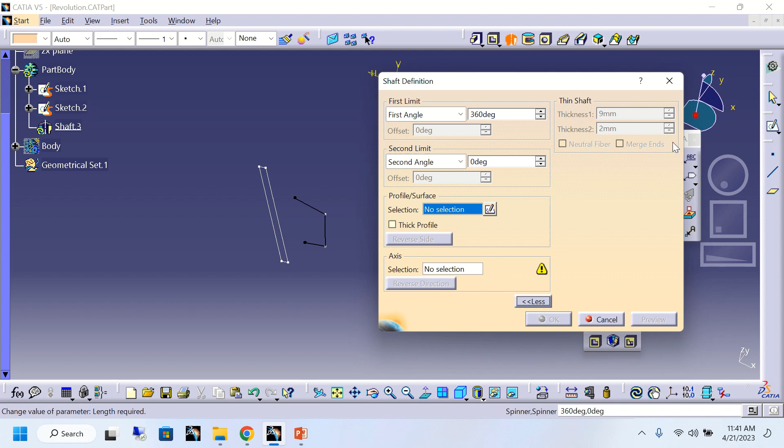And second, you have thin shaft - what is the thickness, neutral fiber, merge - all these things we will cover in this video. So let's go with the shaft.

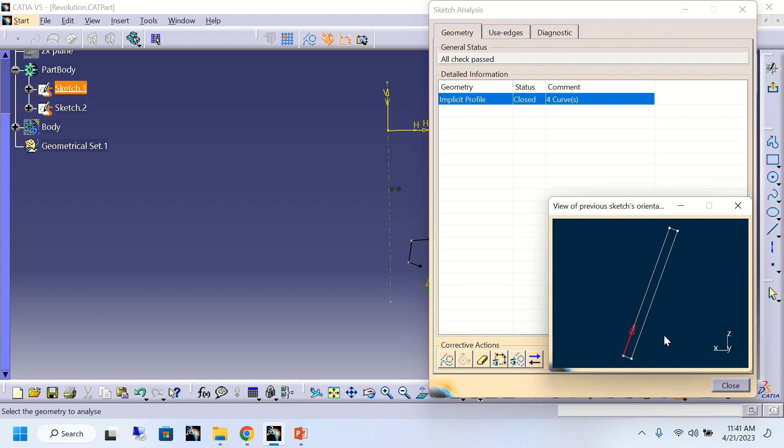This is my profile. You can see I have created two profiles - sketch 1 and sketch 2. Sketch 1 you can see is a closed profile. If you go with sketch analysis, you can see here it is a closed profile. And here I have taken one axis.

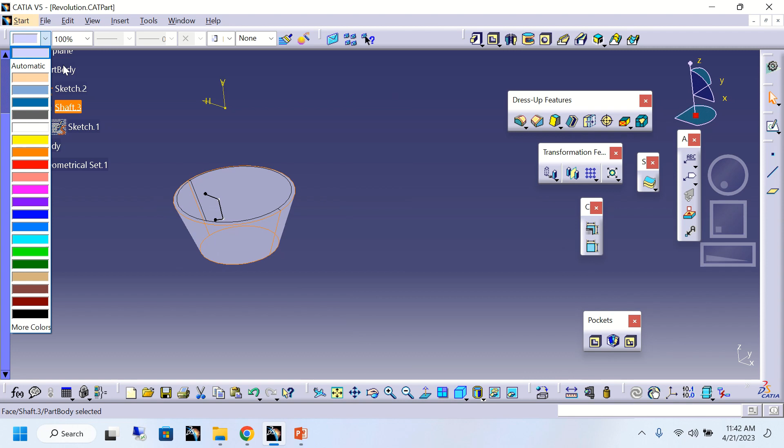Exit out and apply shaft, and reverse the shaft direction. Let me change this color so it will be easily understood. You can see this is the shaft I have done on sketch 1.

Double click here and you can give the thickness also. See, the thickness I added is 9mm, but I want it thick only 1mm, and the second thickness also 1mm. What does this neutral fiber mean?

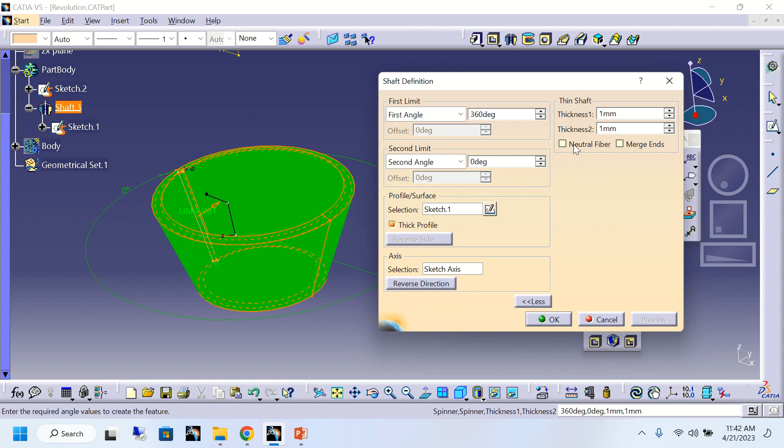Whatever the thickness is, it will distribute from this axis. So let the second thickness be 0 and first thickness be 2. If I give neutral fiber, it will distribute from the middle axis - both sides will add same material, 1mm and 1mm.

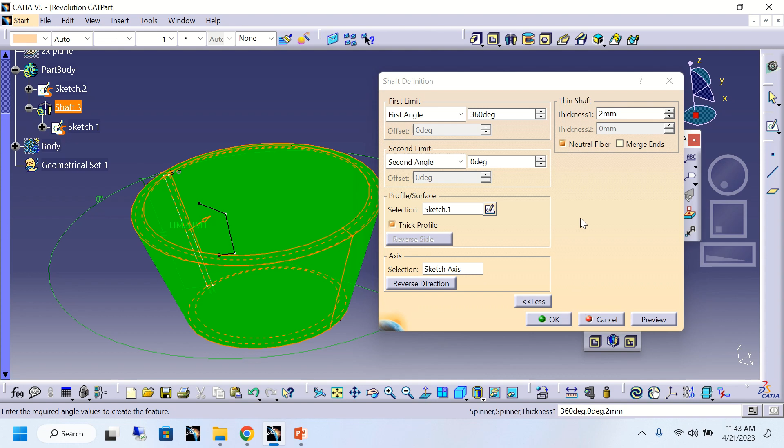So this is the first shaft creation, and here the first sketch is a closed profile. That's why it has taken the shaft directly.

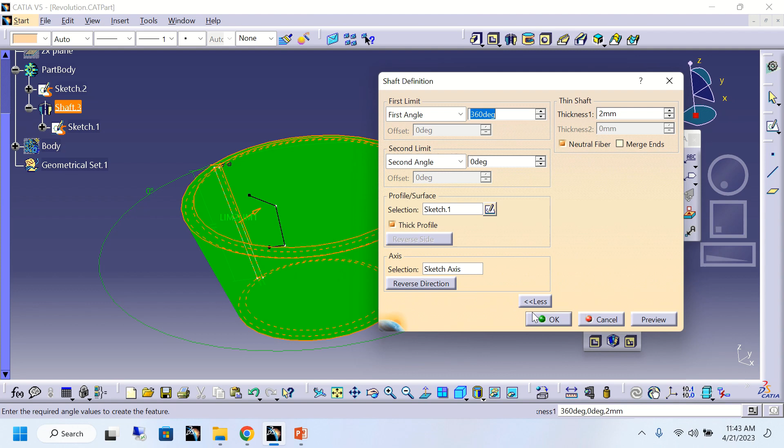Now let's come to the open profile. I will apply shaft here with the second sketch, sketch 2, and you can see it is not taking preview. It says this is impossible because of elimination of the main part, since it is not a closed profile.

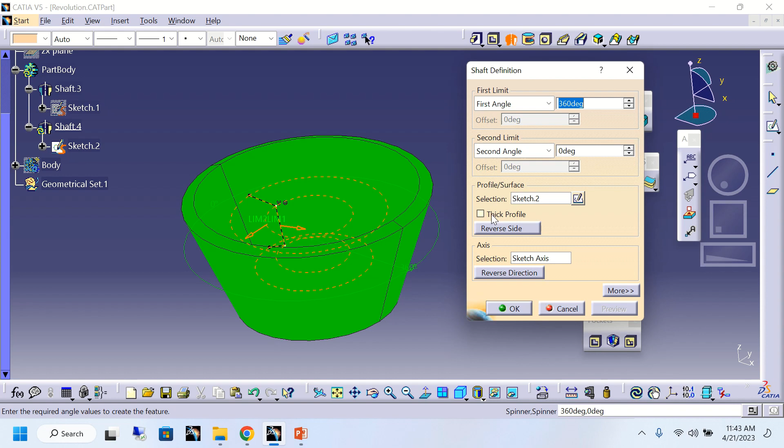So what you need to do is add a thickness here. Check on thickness and give the thickness value as 1mm. Preview with 1mm thickness.

If you give this 1mm thickness with neutral fiber, both sides will add 0.5mm and 0.5mm automatically. So if you give 5mm or 6mm with neutral fiber, both sides will add 3mm and 3mm, as shown in the preview.

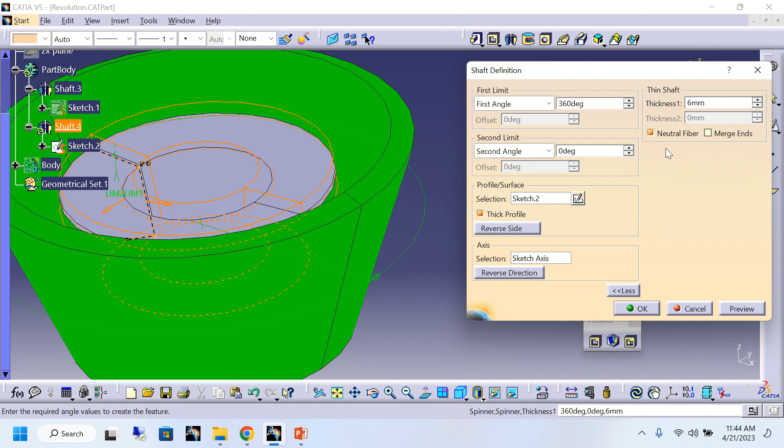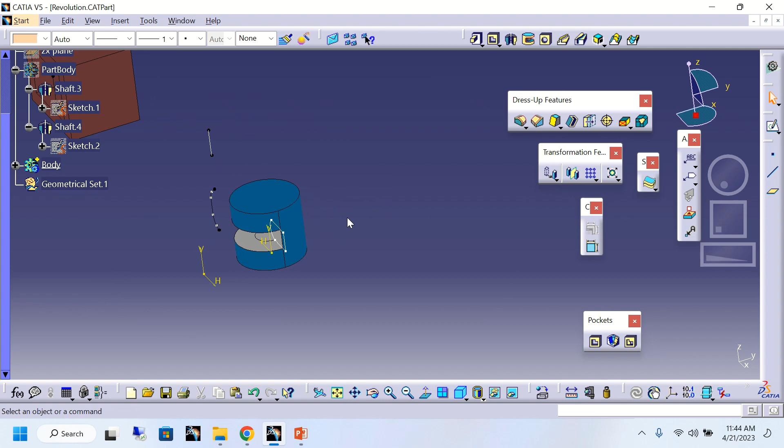Okay, so in this way we can create the shaft. Now we have other options also. I will hide this one and go with the other option.

Now we'll see what is the difference between the neutral fiber and the other fiber option. So here I will apply the shaft here, on this sketch.

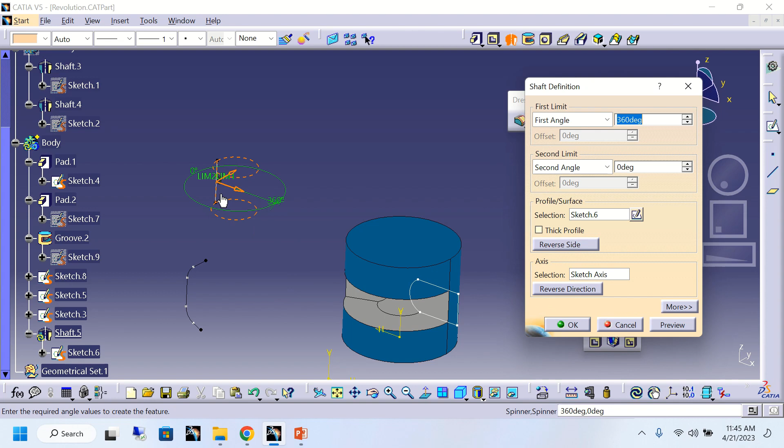Sketch 6 - you can see it is impossible because it has no thickness. So I will give a thickness here, and the thickness value is 6mm.

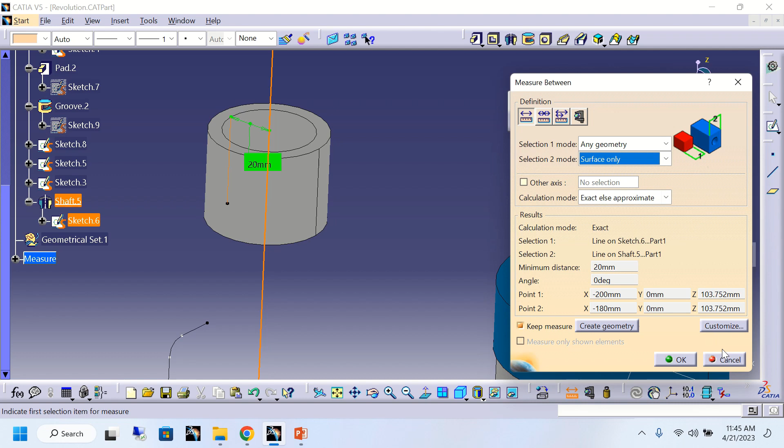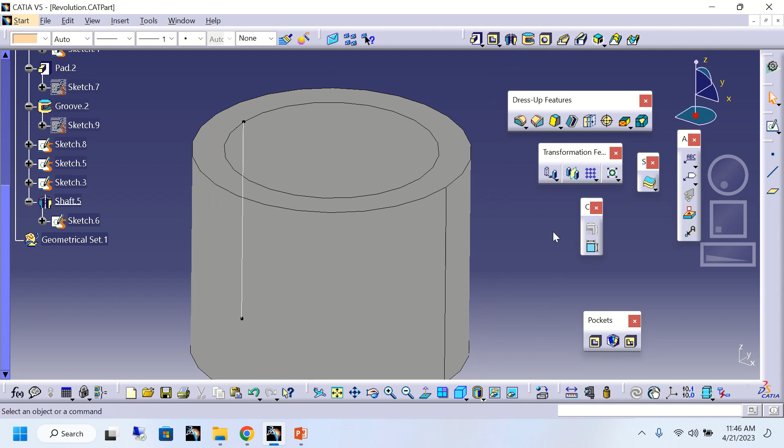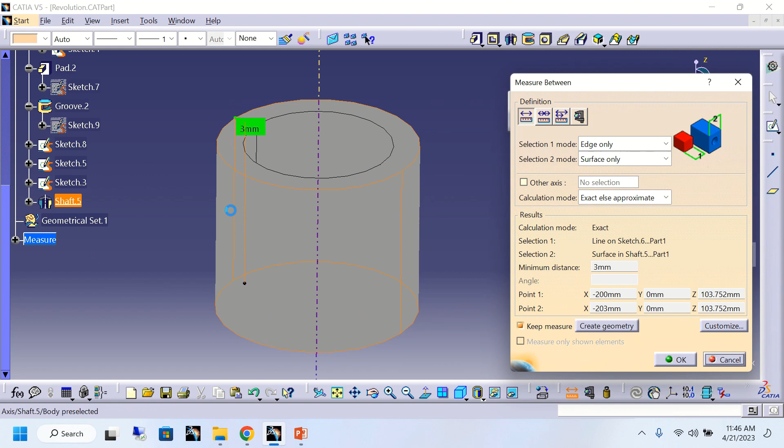But now I will change this to neutral fiber. Now you will clearly understand the difference of thickness with neutral fiber. Preview - so now if you calculate this from the measured edge and surface, it is 3mm.

And from this edge you can see it is also 3mm, meaning it has added 3mm on both sides. So hope you understood this neutral fiber concept. Now let's come to the other one.

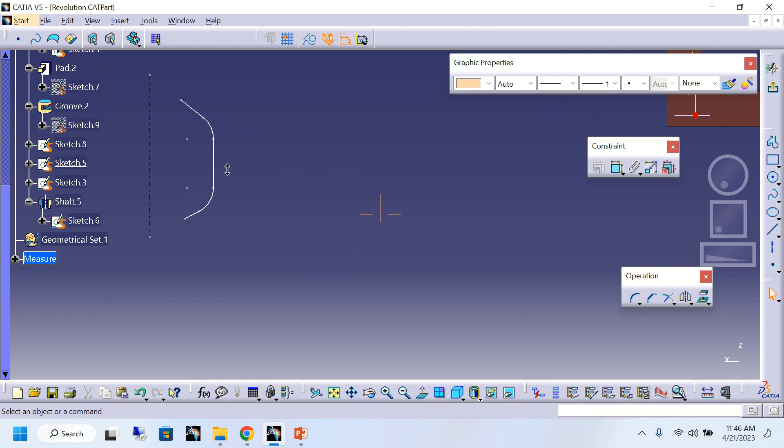So this is my fifth sketch. I have created a profile and an axis here. So I will give a shaft, and you can see I have rotated this with the first angle of 360 degrees.

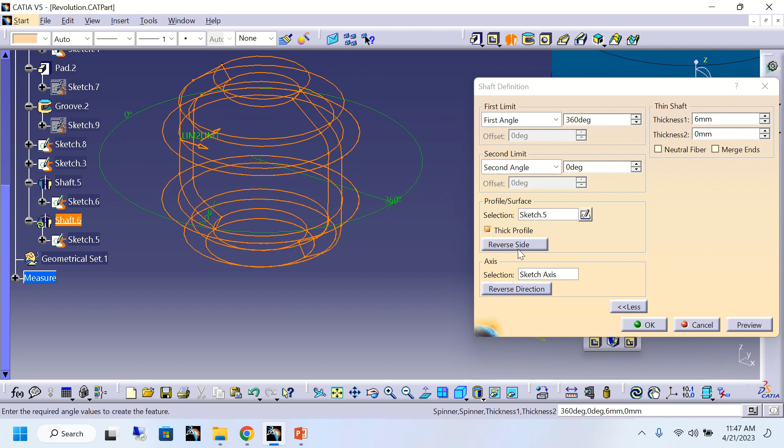I applied the thickness here. If you are not applying this thickness, you can see it is a closed surface. If you are not applying the thickness, it takes the closed volume - how to check that one?

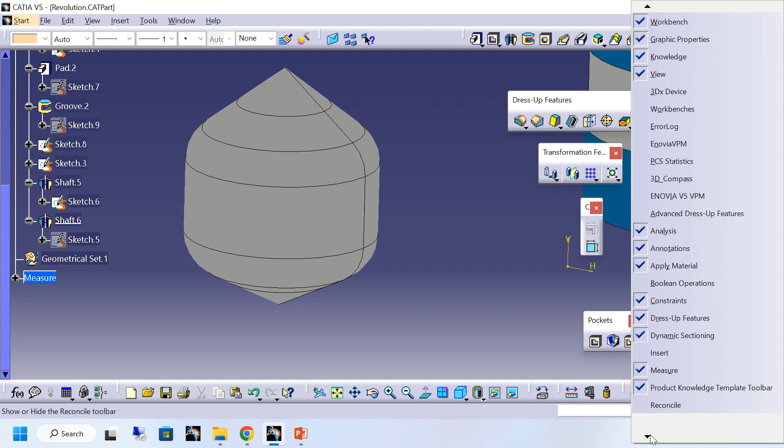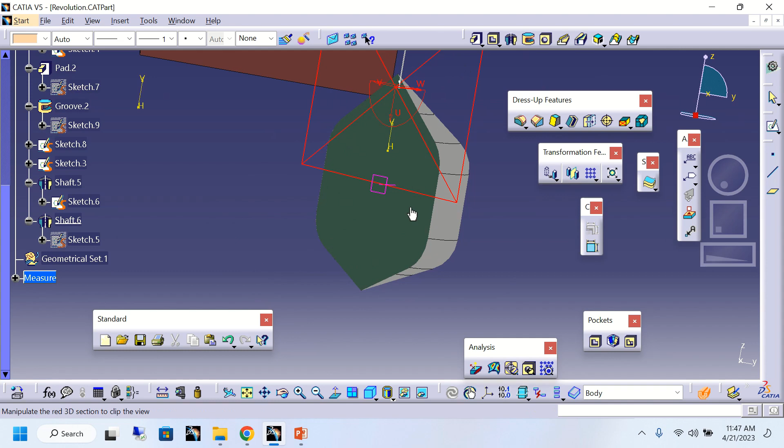We don't have any option. I believe dynamic sectioning is there. I believe it's there. Yes, you can see. Close volume. See, it is not a hollow section, but I want a hollow section inside. So in that case, what you need to do is shaft.

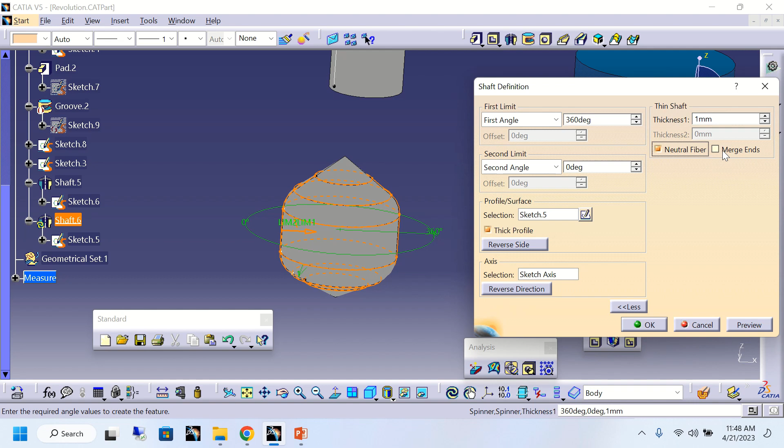You need to give the thickness. Double click, and here I apply the thickness. Let it be 2 mm or 1 mm. Here I will apply neutral fiber, and see neutral fiber. If I keep the thickness, see what happens. It is taking thickness 1 mm, but it is hollow. It is not merged with this.

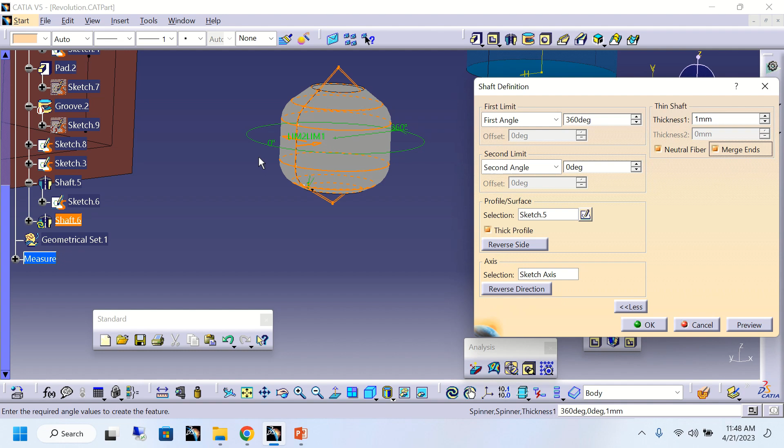So in that condition, what you need to do is double click on the shaft, and here 1 mm thickness is there. Just merge, and whatever edge is there, it will merge with the axis. So preview. Okay, now your merge ends has been defined, and you can see the difference.

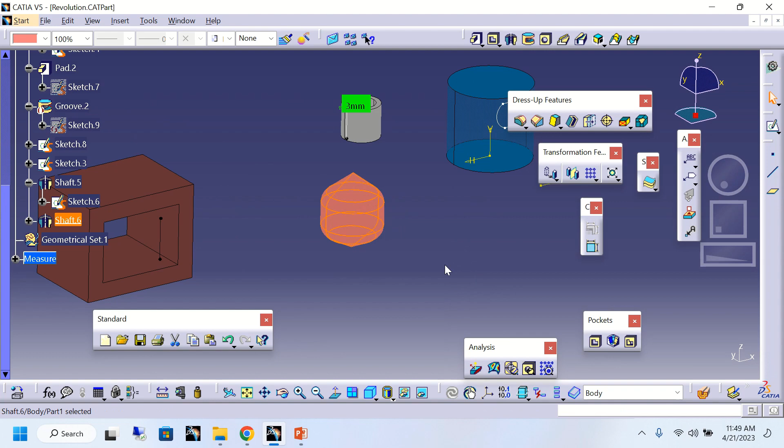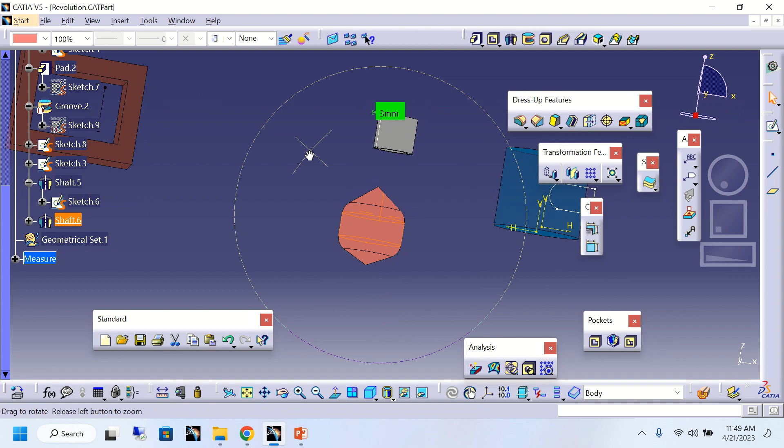Without merge ends it is hollow, but with merge ends it is filling the surface. And if you want to check with this, it's a hollow surface. You can see it's a hollow surface, it's not filled. And the thickness is 1 mm. Hope you got the concept of shaft.

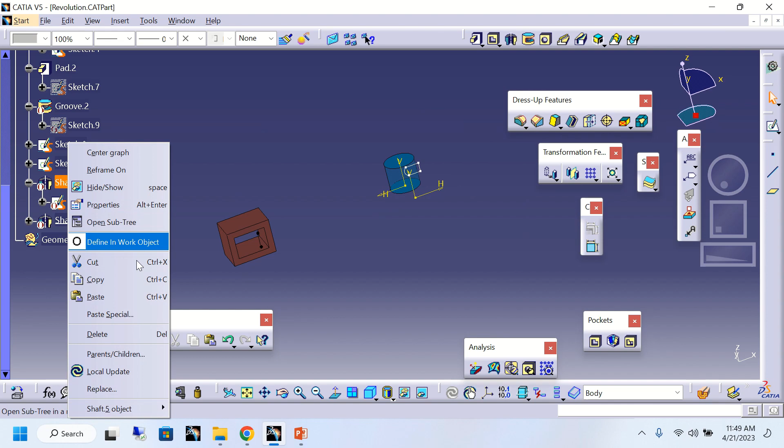Now we'll go with the other option, the opposite tool, that is your groove. Okay, so let's try with groove. Now I'll delete this groove first. See, one operation is there, one pad is there. I already explained to you, without any physical body or physical model, the groove tool won't be activated.

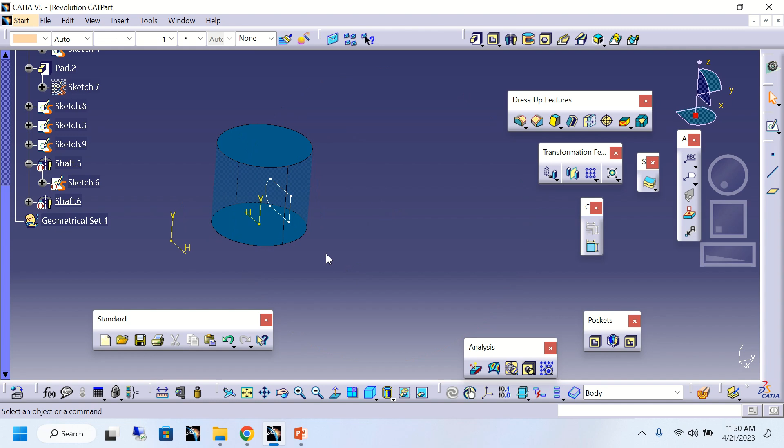So if any material is there in your part, then only groove will be activated. The groove option also needs a profile. If it is a closed profile, you should go with the closed profile directly, no need to give a thick profile. If it is an open profile, you should give the thick profile. And similarly, it has some options: up to next, up to last, up to plane, up to surface.

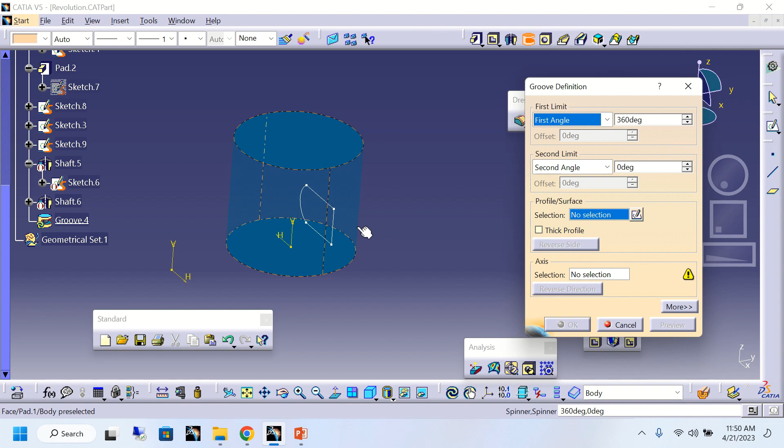If you want to know this concept, you should go to my playlist and find the video of pad and pocket. So now I will select this sketch 9, and you can see here 360. I want 180 degrees to be removed. So you can see 180 degrees is removed.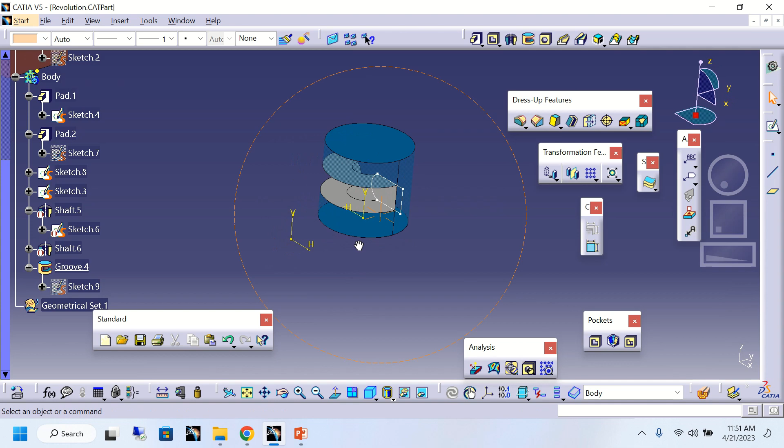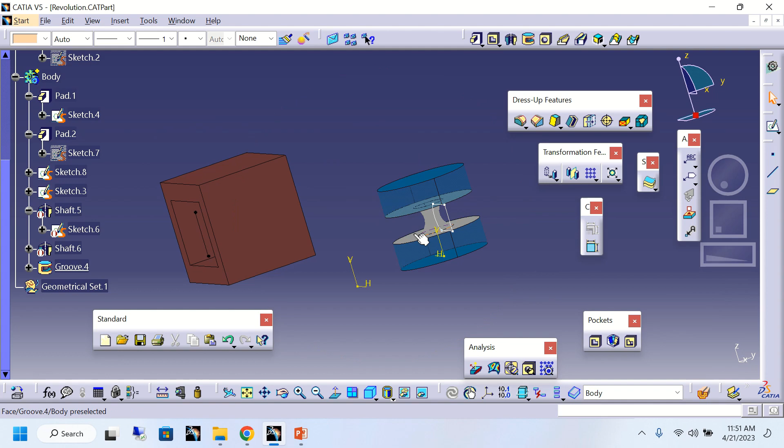If I want this groove up to plane, I want it in the Z plane. So you can see it has removed up to the Z plane. It has removed the total because it is starting from this point and ending with this plane. So it removed the total. So in this way we can use the groove.

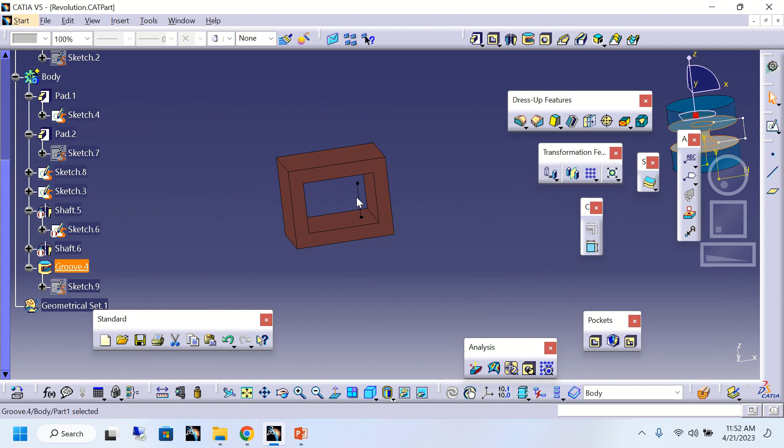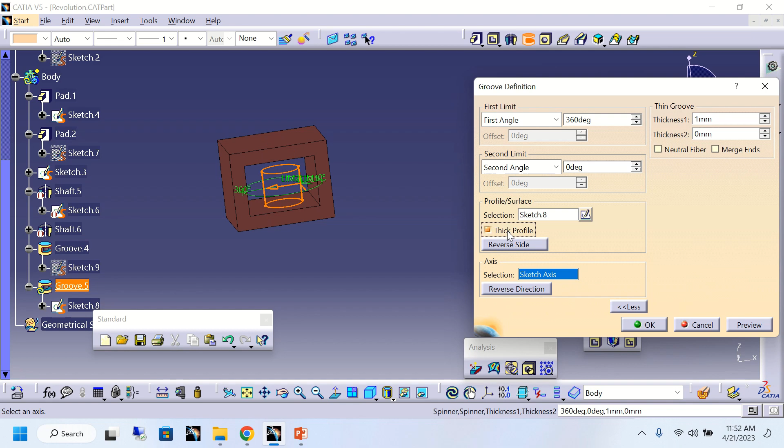Now here you will understand what is the use of a groove. In this sketch 8, I have created a line and an axis. So just go with the groove, and here it is taking the sketch and the revolute axis, and go with the more. If I apply the thickness and preview, nothing is removed. If I give some thickness value here, then only it removes some material, you can see.

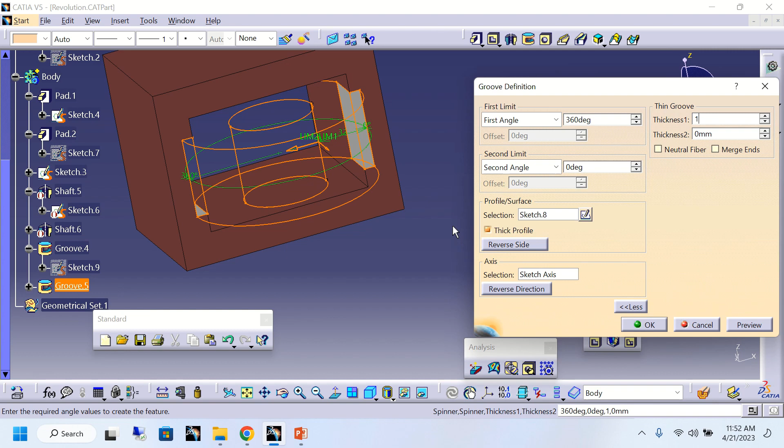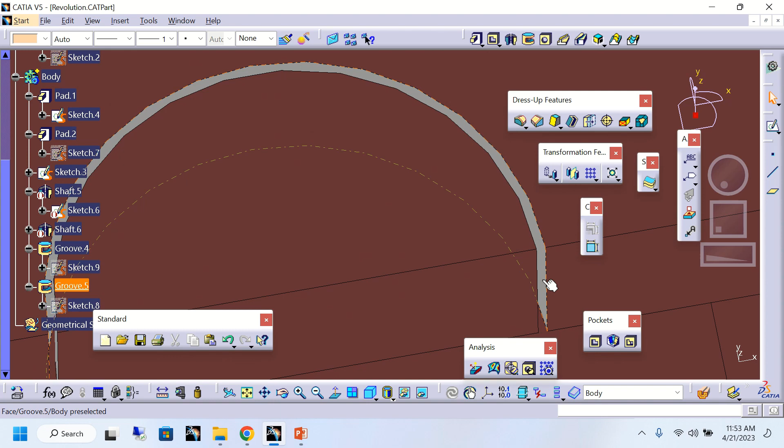But I want vertical removal. So in that condition, just go with this, apply okay, and remove the thickness. So automatically it will remove. Okay, and see the difference. If I give the thickness 1 mm and merge ends, see, material is removing, but it removes only the 1 mm thickness. See, if I increase this thickness, see how much it is removing.

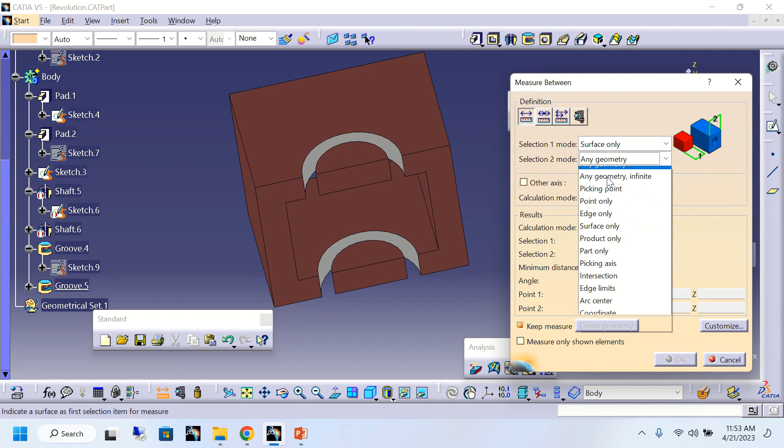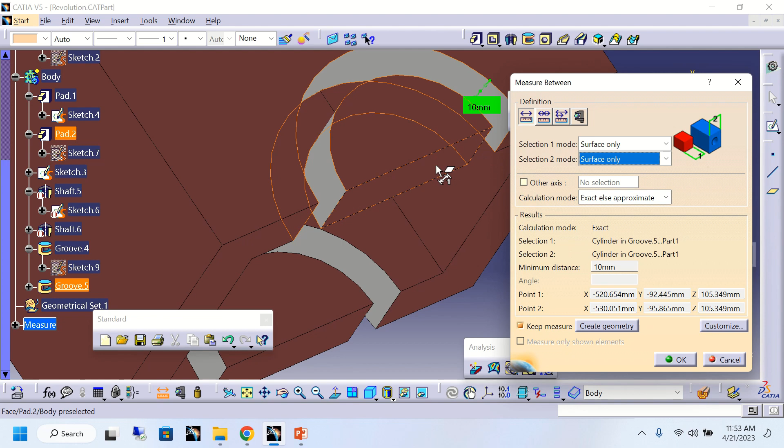You can see by measuring any geometry, sorry, go with the surface, and here is the surface. How to use the measuring tool, I have already created one video on measuring tools in the infrastructure playlist. You can find the video in my playlist. So you can see the thickness which I have added is 10 mm.

If you remove this thickness profile and preview, you can see it has removed the total profile which we created in sketch 8. So hope you got some knowledge on this shaft and groove.